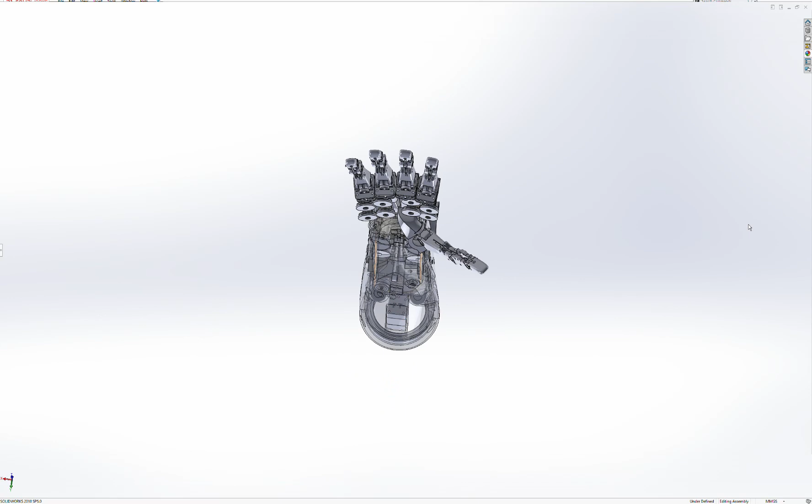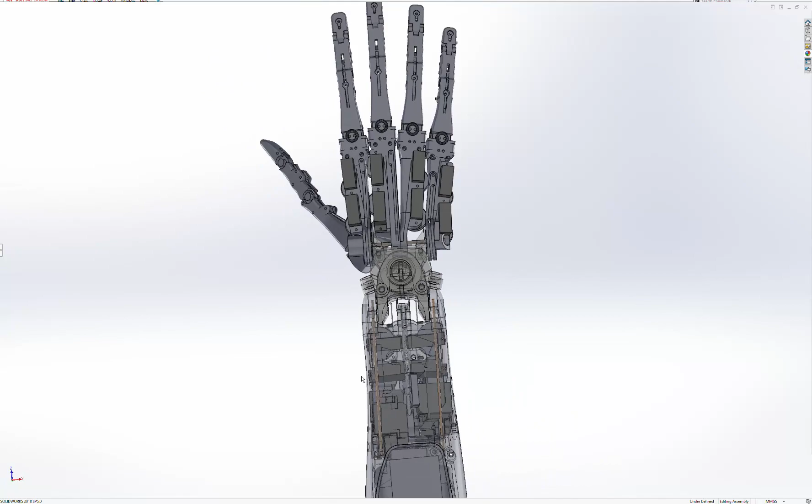A little bit wonky in places, but seems to be okay. Might end up redoing the little finger.

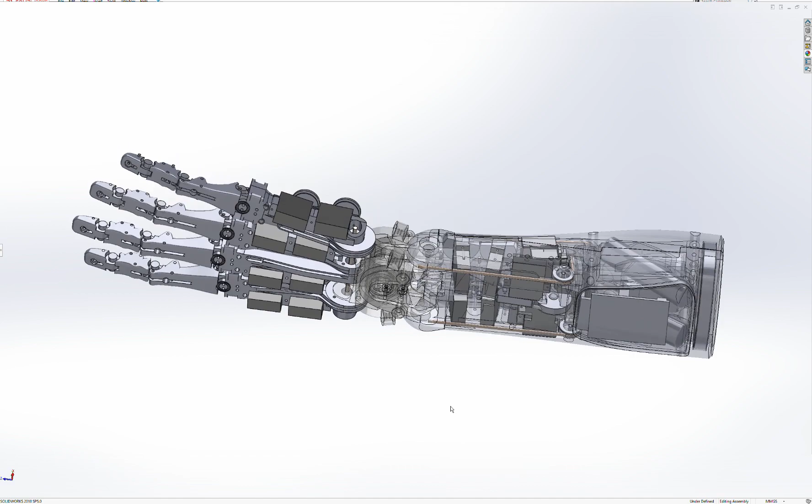A lot of problem printing 0.3mm layers, and then added a bearing between the reel of filament and the post which was supporting it, and I think that was it, stupidly enough. That is an embarrassingly basic error, but there you go.

So I managed to print off all of these discs, which have to be done in 0.3, but otherwise it kind of forced me to print it all in 0.4, which is better in some ways because it is at least quicker and it kind of proves the design.

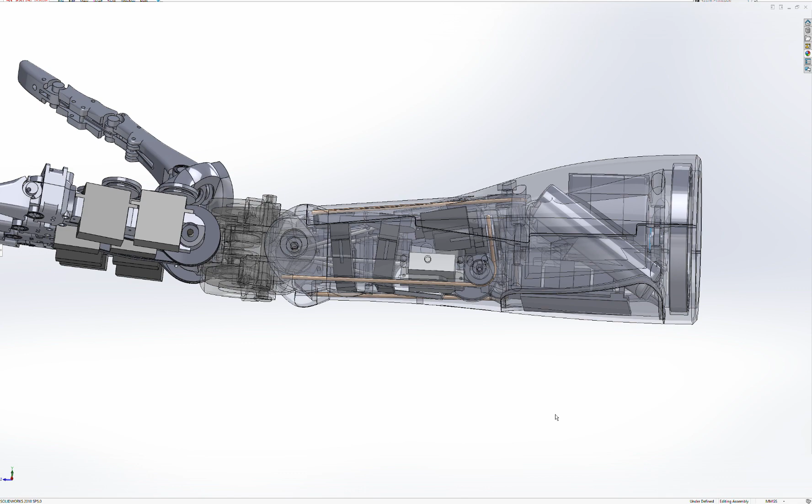Batteries have gone in at a funny angle. They should fit through this hole. Only managed to make one side curvy.

I guess I could do this one as well if it needs it. Depends on my battery. Couldn't be bothered.

A lot of hassle. Earlier detail, which ripples down the whole thing and causes lots of repairs. So I don't know. Aesthetically, does it make a difference? One straight edge, one curved.

Wrist, I realise is untested. Well, I've now printed it in carbon, so that's what I'll assemble next.

The bulk print, the big shells, failed overnight. I think possibly because when I checked it, I then closed the lid.

The nylon seems very sensitive to heat creep, just like the PETG was. But again, I think it was actually largely due to the fact that there was just a lot of friction I hadn't noticed between the filament reel and the post on which it sits.

So added a bearing. Crikey. Should have done that weeks ago. Would have saved me a lot of aggravation. But there it is.

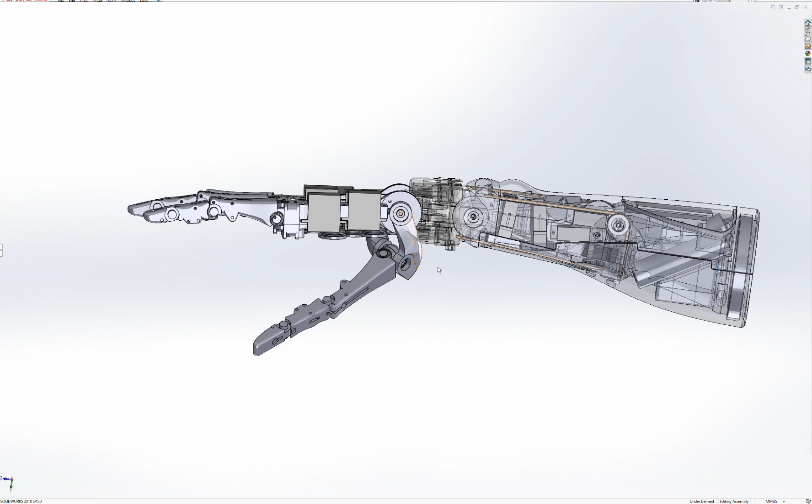Quite neat. There are 16 servos to drive the fingers and the thumb, because the thumb has an extra one, because there's an extra rotation down here which fingers don't have, although of course our fingers kind of do.

That might need to be added, and then that I suspect will just be passive in the fingers. But so far so good.

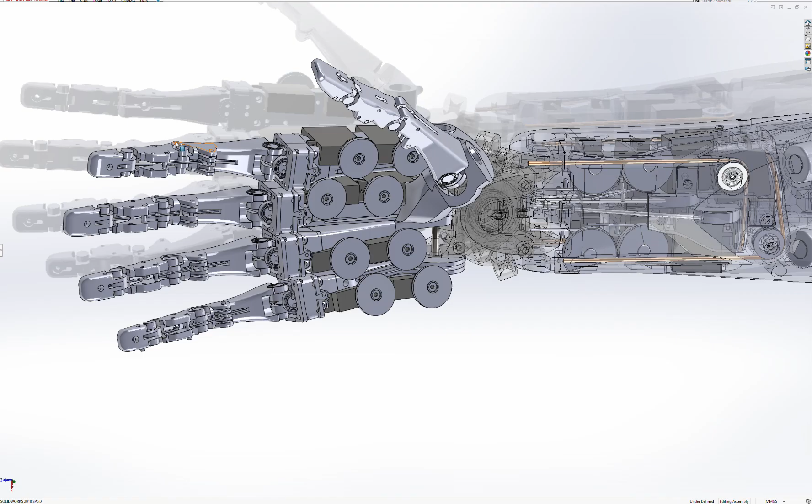These bearings here, which are not shown, in fact, they might pop off, but okay for now. If need be, I guess I could drill through the centres and add something, or screw something on, or just use a bit of melted plastic. I don't know. So far they haven't popped off, but obviously I haven't used it very much yet.

This all seems to fit. I'll use some polymorph, I suspect, to add some of the tendon guides to detail in here. But that will be easier done by hand, and it'll be white, so it'll show up quite nicely. In fact, all the errors are being fixed with polymorph, so they're fairly easy to identify.

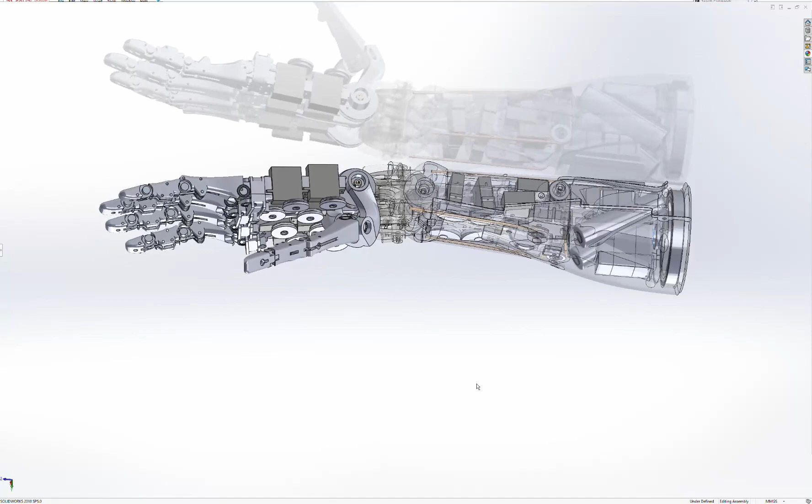Oh yes, so there's a 16-channel servo controller here, which is only €18 from Adafruit, whereas to go up to something like a Maestro 24 is €80. That's a big jump up.

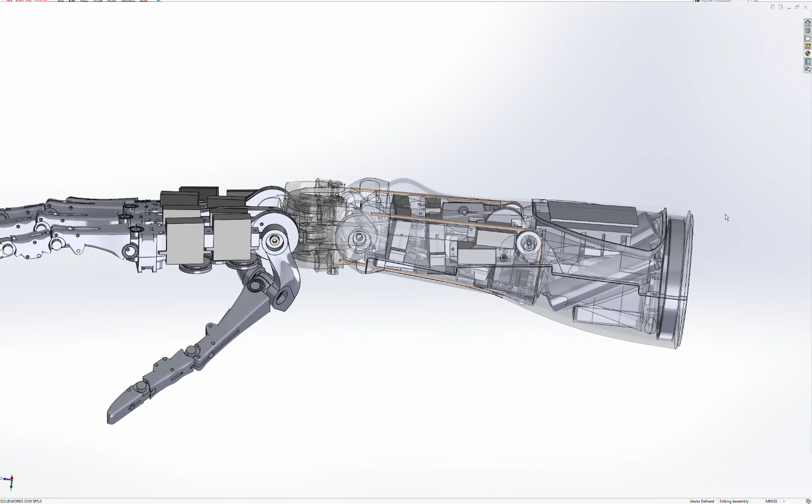This takes I2C. This is an Arduino Mega in small format, if that's not an oxymoron. And that's got 2 serial channels, which is very useful.

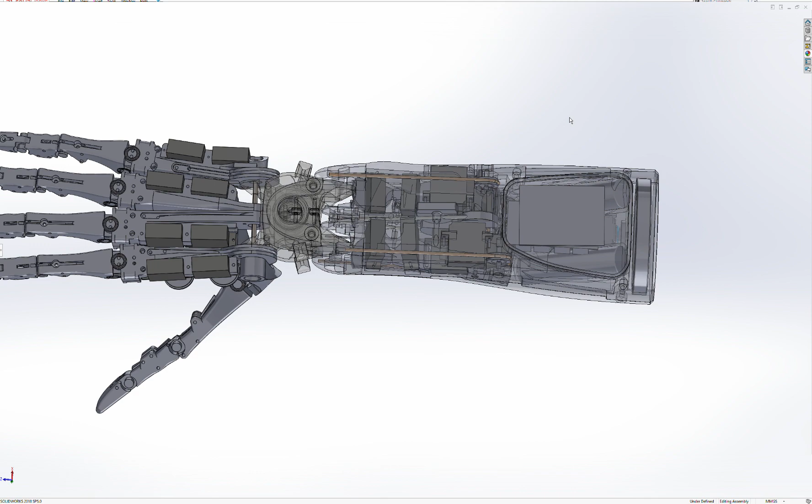Because then you can use one serial channel to receive information from a Zigbee, which will live somewhere down here, and that leaves one to communicate with the servo drive if I go for a serial bus for the 3 wrist servos.

Which is that big one there, and these 2 small ones in here which drive these tendons, which are also not shown. These orange tendons extend round and through here, and then they cross over at the back, which allows 2 servos to drive the 2 degrees up here and the 3rd one there.

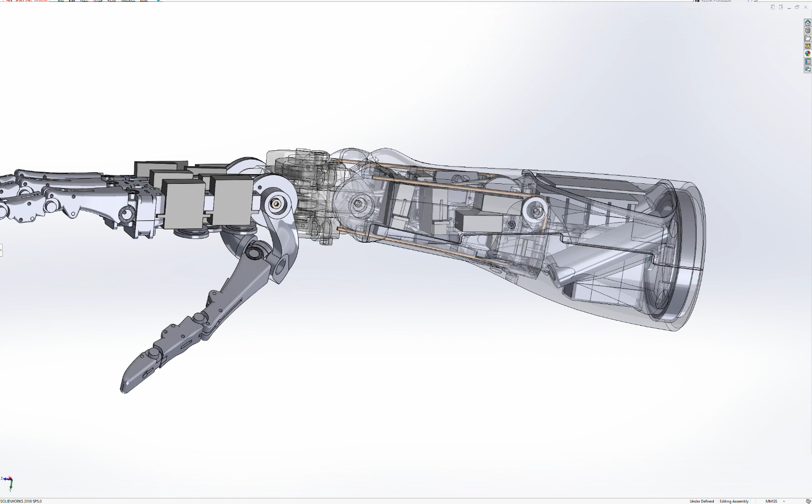So they can either be additional servos off the Mega, just a straight servo command, however you're doing it, or it can drive a serial bus through an adapter, which will live over here, and then that will drive SCS style servos, which are the serial bus servos from Feetech, which I rather like.

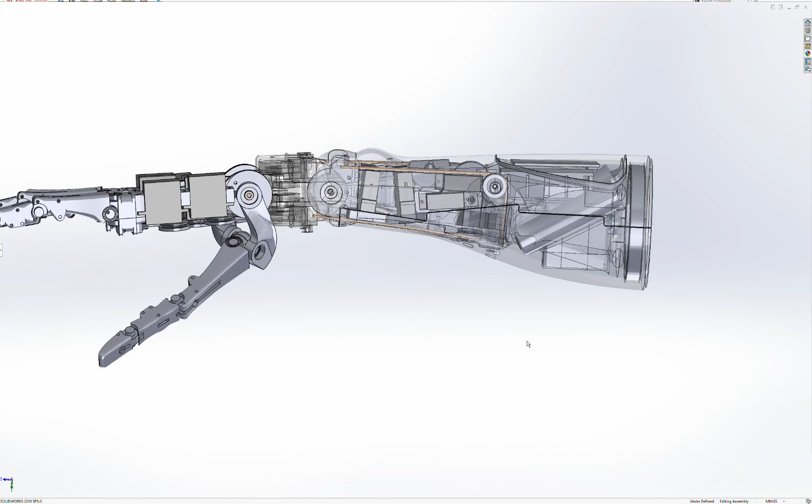And that will improve the mechanical performance of the wrist a great deal, because you can drive the wrist servos at least 300 degrees, and for some models more, under control. So you get more range and you've got more strength because you can use smaller pulleys.

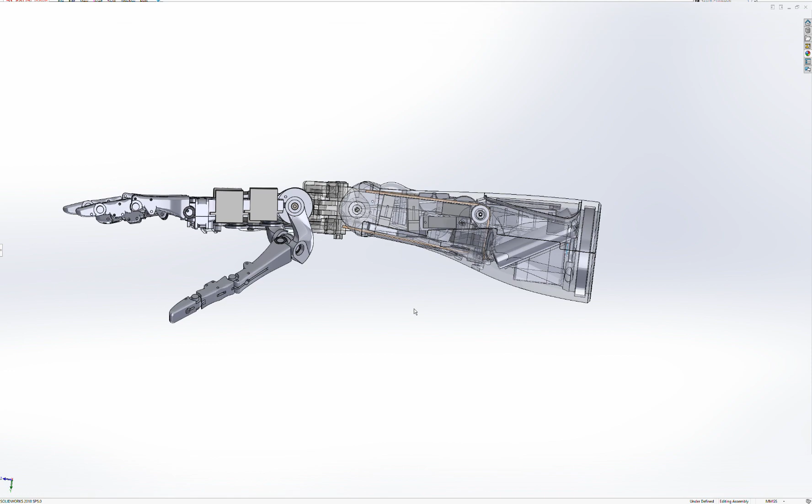But it's sized for big pulleys, for standard servos, and you'll get, I guess, about 90 degrees, I reckon. But with a serial bus servo, you'll get 180 at the wrist. It will go under power, full back and forwards. So that's an interesting extra detail, but nice, works out well.

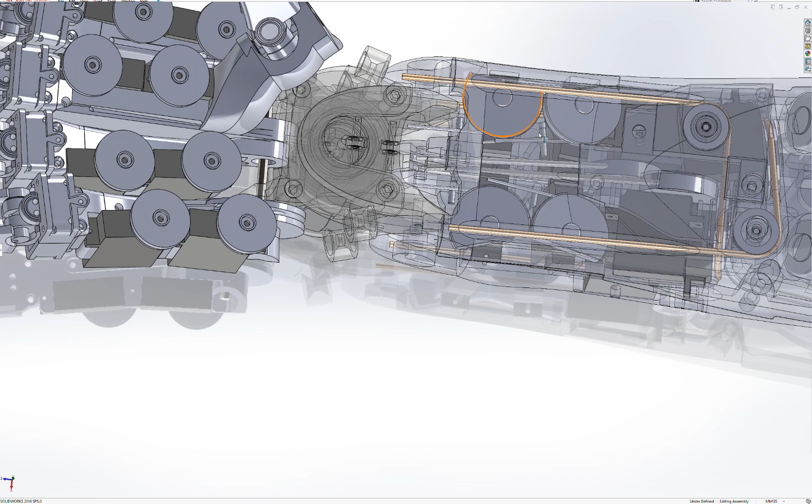I think this is a kind of optimal design actually, because you've got the 4 tendons here which run through the centre, and you've got 2 on top, 2 underneath, and you've got these 4 clustered here which will also drive through the centre. Now these ones have very minimal effect on the wrist.

These ones you can tune either way, and some of these will drive the thumb, or some of these will drive the finger tendons, and in fact you can really choose, because you've got 4 for the thumb and you've got 4 for the fingers, and you can use them however you want.

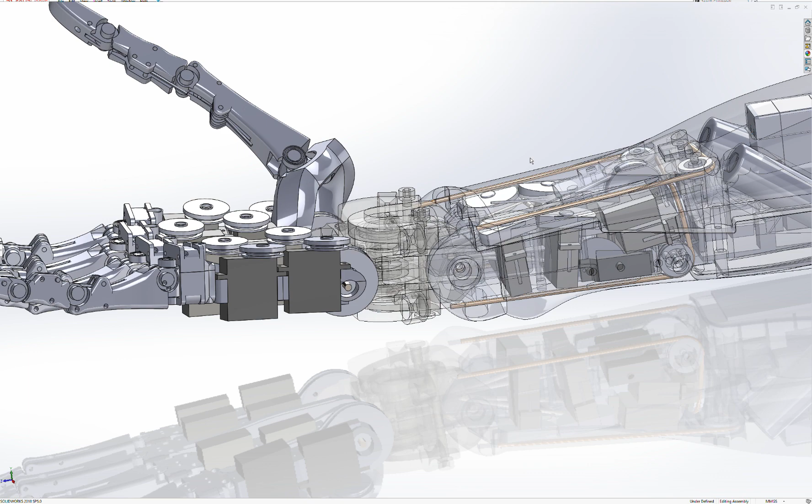And by either passing through the centre of the wrist here, or by going over the top and round it, you can influence the effect that those tendons have on the wrist, like when lifting a heavy object with the palm facing upwards.

So for now I just want to get a single one built and check everything works, and also make a nice video. And then I will try and do some tutorials as to how to assemble these bits and pieces. If there is any interest, please stick it in the comments. It helps a lot, to give me motivation, because I don't like making videos.

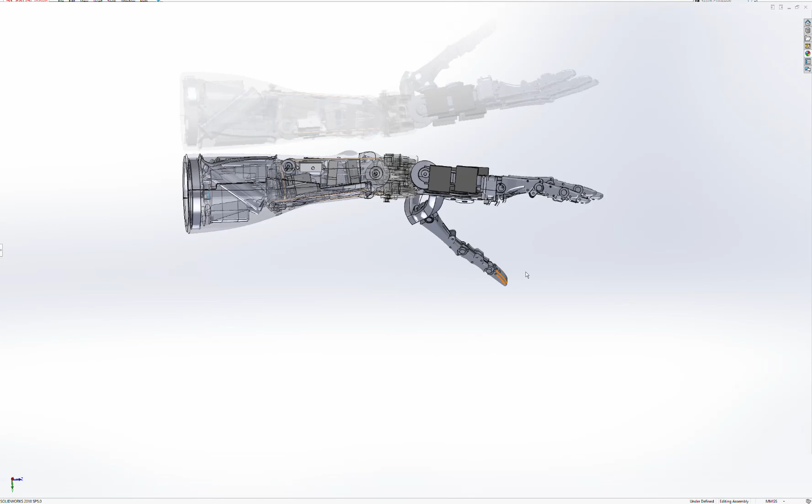That is a painfully boring and tedious task, which is not to say that designing this hasn't been painfully tedious as well, but as I enjoy building robots, I don't mind doing that for a month, but the idea of editing a video for a few days fills me with dread. Might just have to get over that, of course.

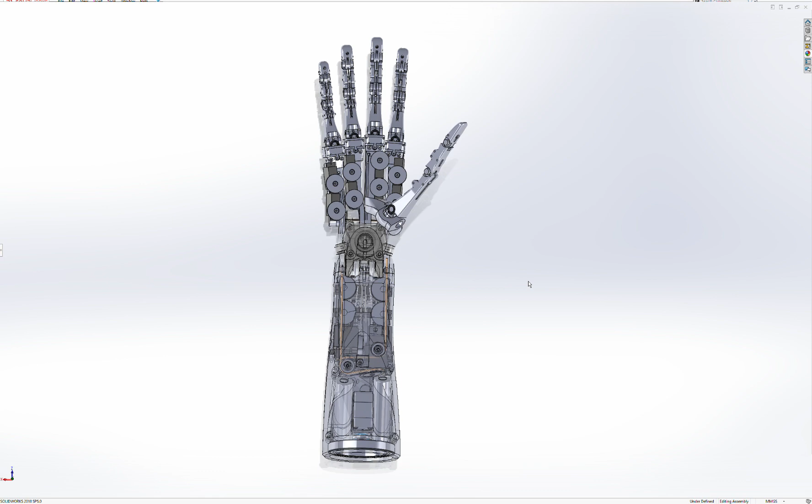But for now, making stuff that works while I have access to the workshop before the summer break is my priority. So I hope to have this gripping things really quite soon.

Fingers are all made. Thumb to assemble won't take long. I'm kind of racing the printer to print this section here. It has got, that might have broken the recording, 4 hours left.

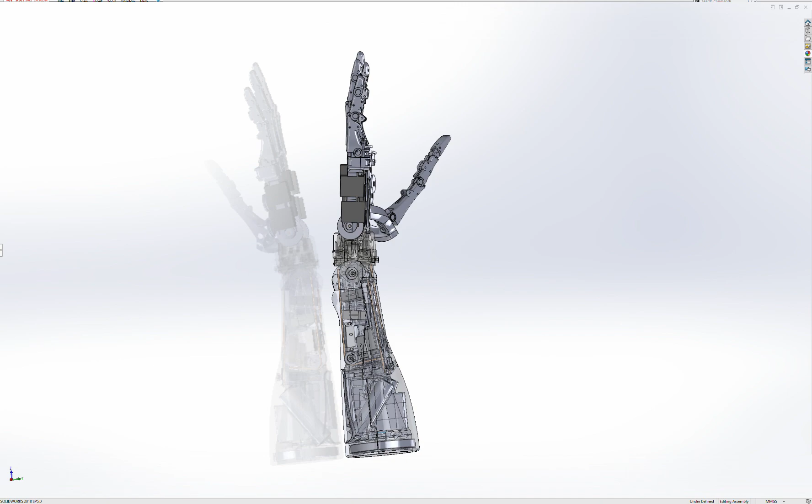So 4 hours to wire everything up, connect all these tendons, to finish all of that. Assemble the wrist. Yeah, it's not bad. So trying to really push hard at the moment, because sometimes you just gotta, otherwise they just don't get finished.